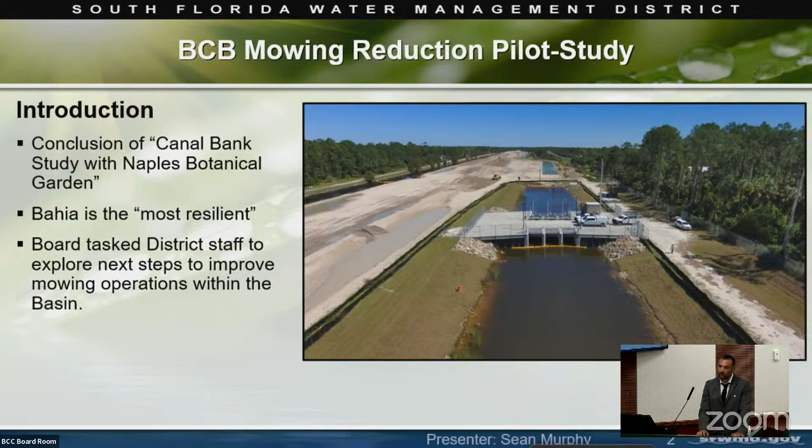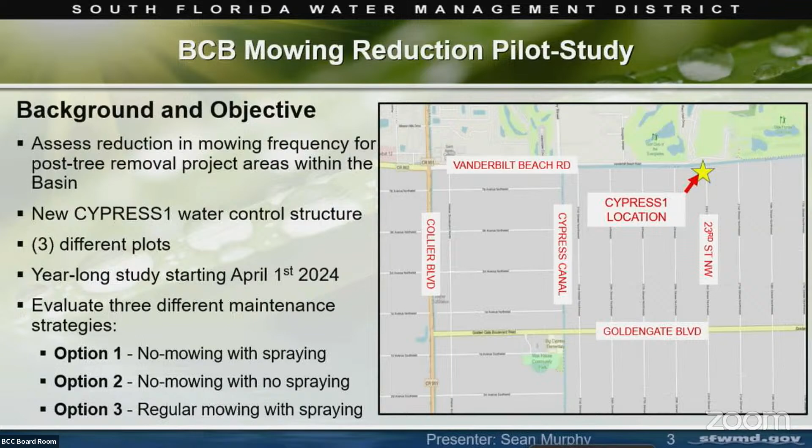So the basin is proposing to conduct a year-long study at the Cypress 1 water control structure while it is currently not connected to our canal system. This study will partition the structure into 3 sections to examine the impacts of implementing 3 different maintenance approaches. Option 1, on the southeast bank, is no mow and spray as necessary. Option 2, on the southwest bank, is no mow and no spray. Option 3 is mown 4 times per year to a height of 6 to 8 inches and will also be sprayed as needed. Option 3 will serve as the control of the study since it's maintained per typical of our rural areas along the canal.

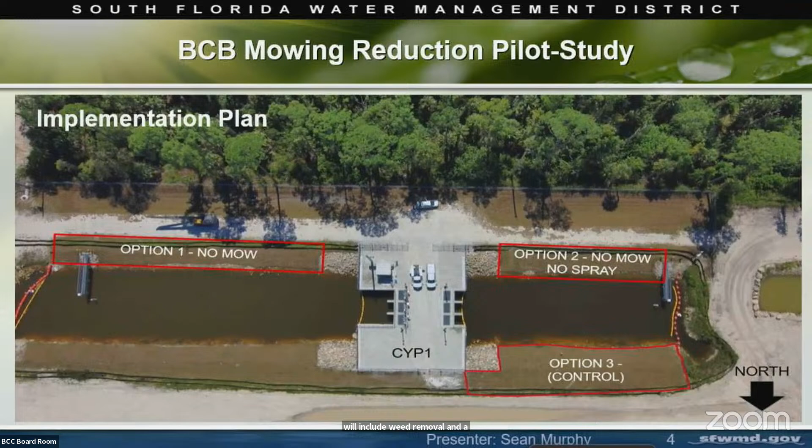Prior to the study, the basin, with the collaboration of the field station and land management team, will install signage, conduct a pre-study site survey to document existing conditions, and also do site preparation, which will include weed removal and a mow, so that we can have a baseline prior to the start of the study.

The field station, land management, and district project manager will all meet on site monthly for the duration of the study, and we will monitor and collect the following data: average plant height, photos, percent coverage, and a running list of invasive species in the study area. We'll also keep a detailed record of costs associated with mowing and spraying.

Additionally, there will be monthly reports summarizing the conditions and data collected at each site visit. At the end of the study, a final report will be created with the help of the field station and land management team detailing the results and findings. A final presentation will be given at the August 2025 board meeting.

So in summary, as part of our ongoing efforts to improve canal bank maintenance operations within the basin, and with the board's concurrence with the study, we've reviewed various strategies and identified an opportunity at the Cypress 1 water control structure. This study will evaluate the effectiveness of the 3 maintenance options and gather valuable data so we can better inform future decisions regarding canal bank maintenance, with the overall goal of reducing operational costs.

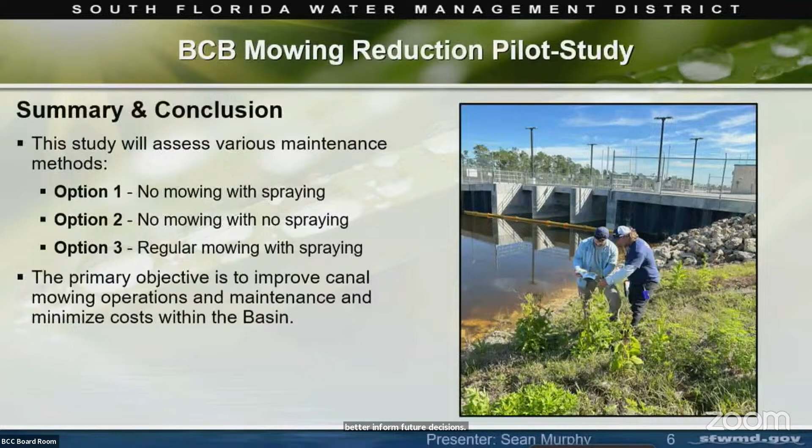So with that, Madam Chair, any of the board members have any questions? I'd be happy to answer. Great, questions from the board?

Go ahead, Andy. When you're spraying, what are you spraying and what do you spray with? So this will be sprayed by backpack application—they'll be going along doing spot spraying treatment. As far as the chemical, I think it's 2,4-D that we use. That's pretty standard throughout the field stations and land management.

Okay, other questions from the board? I had a question for you, Sean. How did we get to the point where we wanted to test using just Bahia?

Yeah, so we got there by concluding our study. From our previous meeting, we found that Bahia grass was the most resilient. We tested the alternative species—those 3 other species—and also worked with the land management team, going over their previous studies and what species they've used. The major issue was just the weeds and invasives, and Bahia had the most robust root structure—not only for our main priority of flood protection, but also to outcompete the invasives and other weeds. So it was the most resilient, and that's how we came to that conclusion.

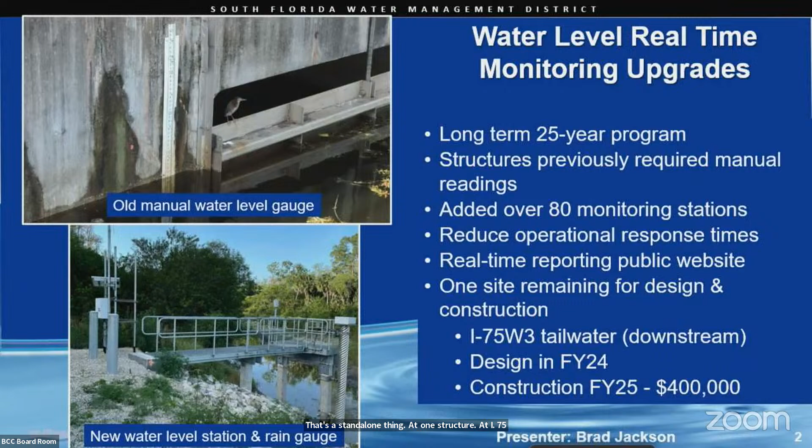So we've been working on this, and on the bottom left of the slide there's a picture of a new station. That gives us real-time information down to 15 minutes or less on rainfall, water level, and other monitoring parameters if needed, like flow. We've put these in all over the basin, and I'm happy to report we have one remaining standalone structure at I-75 number 3, where we still need to do the downstream portion. One of the neat parts of this is I can see it from my office to manage the system, but we also put this out on the website for everyone to look at.

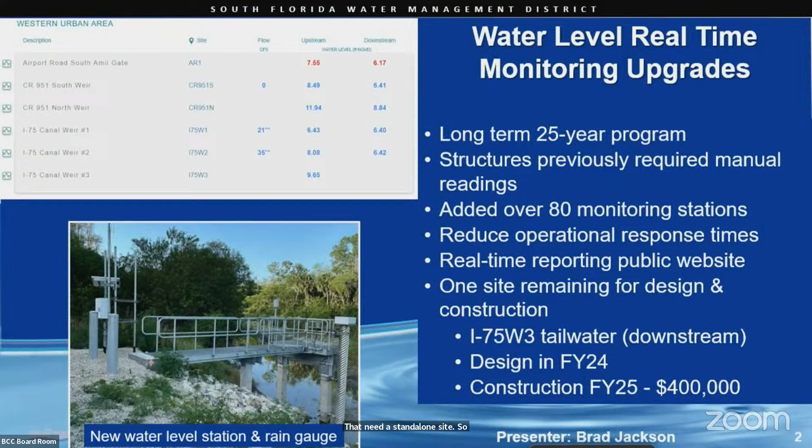We're in design right now of that last structure, and then we'll be working on construction for next year. We've got a $400,000 budget for that for next year, and that should wrap up everything we know so far that we need. There might be some other things that come up from maybe the CWI project or something like that, but as far as our flood control system, we have all of the bases covered that need a standalone site. So it makes my job a heck of a lot easier to monitor the system and respond correctly to what's going on.

Continuing along the same lines as communications and real-time monitoring, all of this infrastructure we've built to monitor real-time water levels and rainfall, the tower that we're proposing to build just northeast of Lake Trafford, is a critical backbone to that system. You've seen this one before; it was discussed previously. We've been working on design of this for a while.

Just to give a little background, this eliminates our reliance on the cellular network. Yesterday there was a widespread cellular outage, and it didn't affect us, fortunately. We could still see everything, but that dependency could affect us in the future. It does routinely go down during storms, not giving us the best ability to see everything.

So when we finish this tower, we'll have that connectivity through hurricanes, through rainstorms. That connection system is basically always up. There's a very, very small downtime, and even when it is, we still have a backup path so that all that information can still get back to the water managers, the control room, and to the public. So it's very important for us to get this last bit of the communication system in.

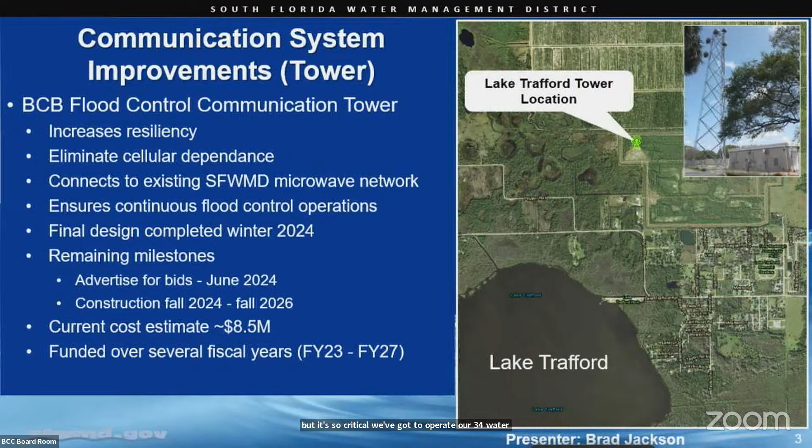I'm pleased to report that the final design is rounding the corner. We finished our 90% plans this last winter, and we've got some remaining milestones on the slide, but basically we'll be going out for bids this summer, with construction anticipated to start this fall and take a couple of years. We have a current cost estimate of about $8.5 million. It's a large project for the basin, but it's so critical—we've got to operate our 34 water control structures and provide flood protection for everyone who lives here. I'm so glad to see this one moving along personally.

Moving from communications into flood control improvements, we've got a program to improve flood conveyance for certain key areas of our canal system. We can't widen all the canals everywhere we want to or need to, but we do have some systematic places where we can widen them and improve how much water can move through the system.

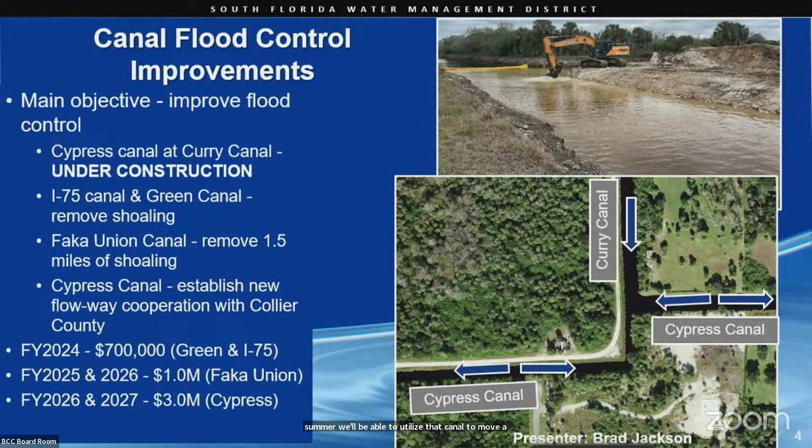That's where we want the water to go through during a storm event. So the goal of those projects is basically to remove that excess material so the water can move freely. There's also additional shoaling we've identified, about 1.5 miles long downstream of the Faka Union number 5 structure. It's all the way on the east side of our system, and there's quite a bit of sedimentation we need to remove there. We've got funding allocated in 2024, 5 and 6 to tackle these areas and get that material out.

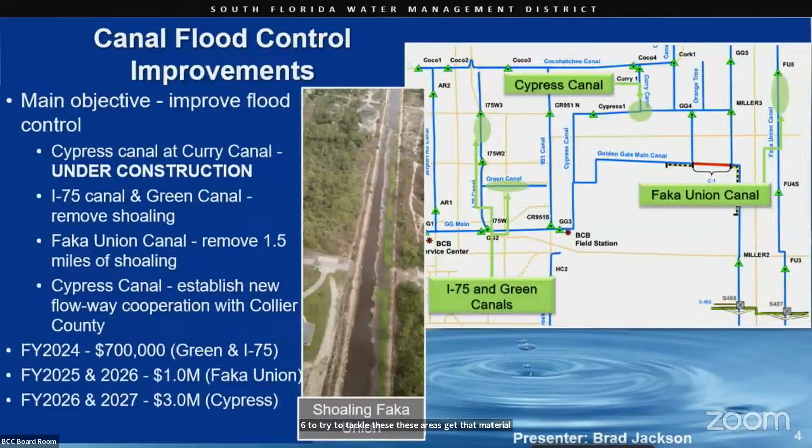Next here we've got the Corkscrew Canal Headwater. This one ties into what Lisa just talked about with the CWI project that's just getting kicked off. To back up a little, we've been working on a hydrologic model that simulates what's going on in the region for the last few years. That tool is complete this spring, and it tells you how the wetlands work, where the water flows, and how the system responds to real rainfall. It lets us insert projects into that tool, and it'll simulate what may happen as an effect.

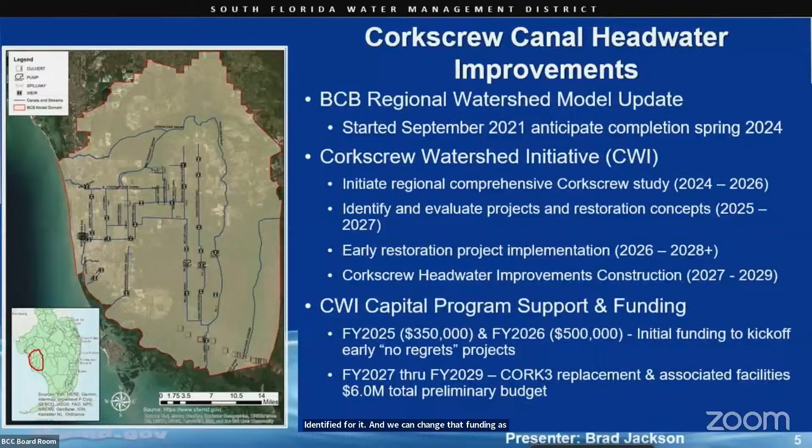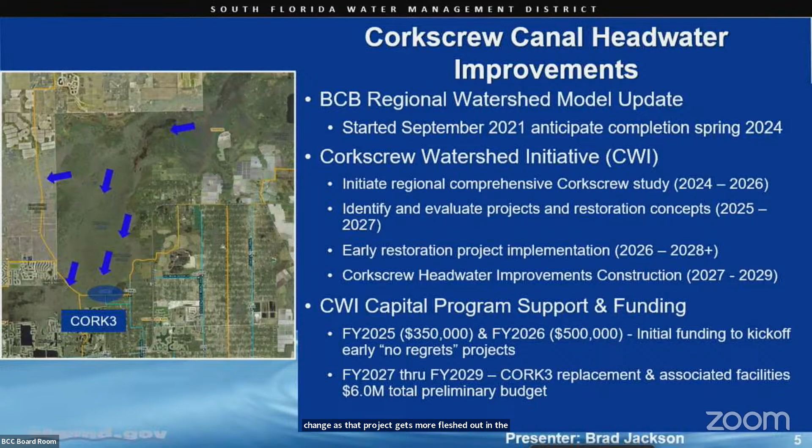We don't know what they are yet, but we have funding identified, and we can adjust that as those projects get more fleshed out. It's important to get these things completed and get those projects identified and started quickly. The last bit of the support program for the Corkscrew Canal Headwater is our Cork 3 structure. Over here in the blue area is our Cork 3 structure, one of our further northern structures, and it's an interface between Bird Rookery and our canal system. We know something needs to be done with that structure to improve the interface between the swamp, the natural areas, and the canal. We don't know exactly what that will look like, but we have money programmed in the further out years as the study finishes to help inform us what we're going to build, what features, what type of structure. We have some money programmed in for that right now, $6 million, but that will change as the project gets more fleshed out. I'm happy to see that one get some legs and get moving, because that structure definitely needs attention in the future.

So I'll move away from restoration and into a little bit more flood control. This is the I-75 canal. It runs north-south, basically from Golden Gate Parkway all the way up to Immokalee Road. Here we have a structure on Pine Ridge Road, called I-75 number 2, a very clever name. I-75 number 1 is further south, just south of Golden Gate Parkway.

The number 2 structure is an older structure that requires manual operation, and we're trying to get away from all the manual operations we have. When we replace it, it will help us improve the flood control of the system, and it'll help us hold more groundwater when it's hydrologically appropriate. We don't want to do that in July necessarily, but in the dry season, when we want to hold onto that extra water, it will allow us to do that and respond correctly.

The I-75-1 structure is basically redundant at this point. The downstream structure we built, GG2, kind of takes the place of I-75-1. So it didn't really make sense to keep maintaining an old structure that serves no purpose. It's just in the way.

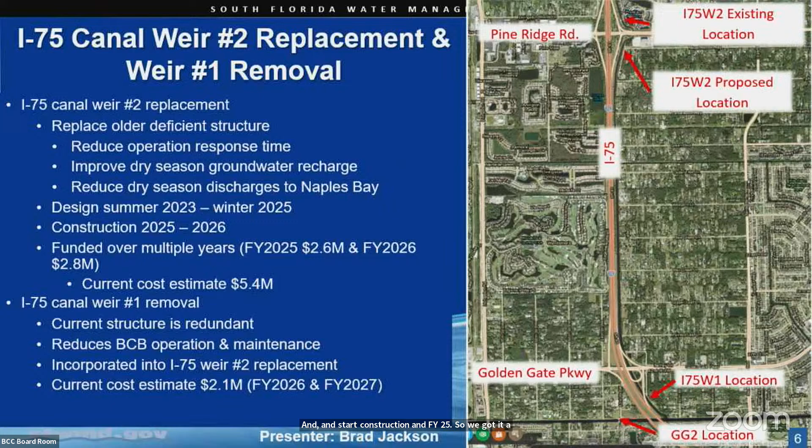So the design for both of these are underway. We packaged them together to get some savings there. The I-75-1 structure will be completely removed, and the I-75-2 structure will be moved south a block or two, just on the south side of Pine Ridge Road, and start construction in FY25. So we've got a little bit more than about a year of design left to finish that up, but it's well on its way and looking good.

So more on flood control improvements. We're going to shift focus here to the eastern side again. This is Faka Union. If you remember where the canal flood control improvements were, this starts where that one stops. So at FU5, which is the bottom star here on the right picture, this study is going to have us look at these 3 control structures at the very top of that system. They're basically the original system that was built when the canals were built, some of them. FU5 has its challenges. You can see on the bottom left, it gets clogged up with debris just on a routine basis.

The field station does a great job removing debris and keeping all of it out of there, but it can break loose and get clogged up in those small gates no matter what we do. So this project isn't necessarily construction right away. It's a study. We want to figure out how do we want to rebuild these, where do we want to rebuild them, and then we can program exactly how we want to do that and when we want to do it. But first we have to have a plan, and so this plan will basically tell us how and when to do the structure improvements.

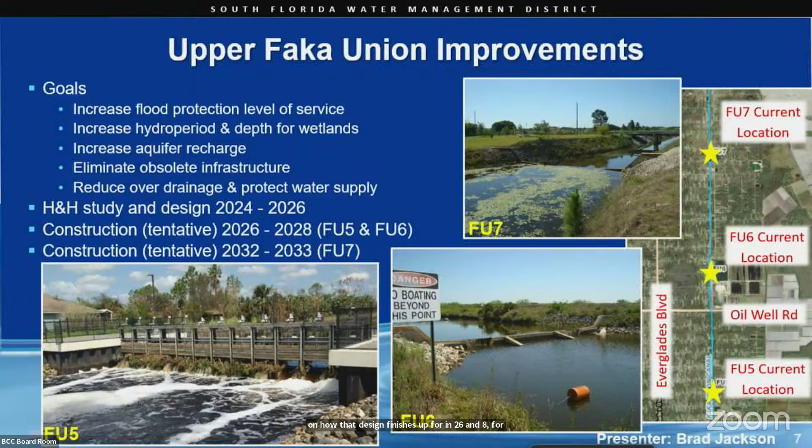Our belief is that FU number 6 is redundant. We need to complete the study to support that, but we think it's redundant, and we hopefully can remove it and have one less structure to maintain, because it serves basically no purpose if we upgrade the downstream structure. So we've got the study starting this year in 2024. It'll take a couple years to finish all that up, and then hopefully we can start construction, depending on how that design finishes up, for in 26 and 8 for those southern 2 structures, and move those along, which will be a great benefit.

So when we completed our flood protection level of service study, this structure looks susceptible to storm surge events. It's susceptible to sea level rise. Its level of service will decrease over time if we don't do something to improve the structure. It's a difficult structure to operate. It's got manual gates, some of them are automated. So it's a challenge to deal with in a storm event.

So really the main goals of this project is to improve the flood performance of the system. And that may not mean anything with those words, but in essence, we want to lower the water levels during a storm event inside the canal. And if you can do that, then the water can more easily get to the canal and reduce the adjacent flooding in the community. Another thing we want to do is reduce the storm surge effects.

As we've seen in recent history, we have susceptible events from storm surge. So this one, we were fortunate the way Ian came through. This one didn't get impacted as much as others, but that was just chance the way that one came on. So we want to redesign these in a way that we can account for some of that and reduce it. We'll never be able to eliminate it completely.

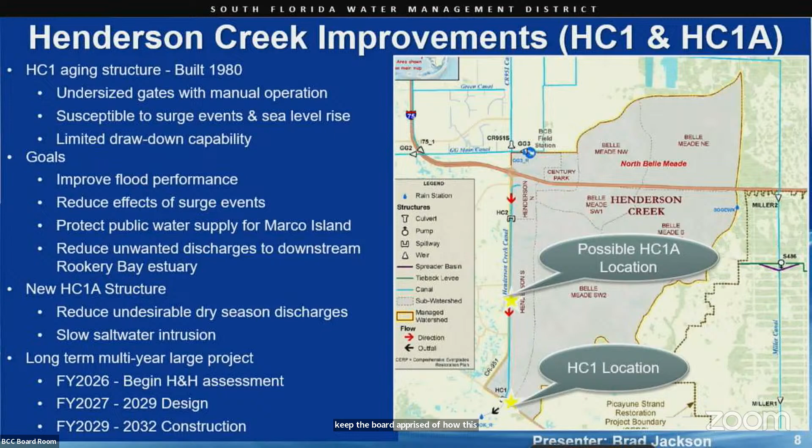So back up east to the system, this is Golden Gate #5. To orient everyone, this is between Everglades and Immokalee, just north of Randall Boulevard, where the current structure is. That area, along with all the other Golden Gate Estate areas, has a lot of development. Drive down any street, there's homes being built. And so the main goal of what we're trying to do here right now is identify the spot where we want to put the new structure.

We want to secure the right of way for it so we can get that, so no one puts a home there that we then have to work with and deal with in the future. So that's the main goal in 2025, is to purchase the right of way for where the new structure is going to go. Fortunately, we've already kind of identified, we did the modeling in-house to tell us where we want the structure to go. And what you see on the left, I'll explain that a little bit.

That's really the dry season benefit of the structure. So the current structure today is set too low and the groundwater over-drains. We can do better than that and hold that fresh water in the system. As I've mentioned during my water conditions report and other times, the more we can hold that in, the more fresh water is available and the less that goes out to tide that is not needed.

So the different colors on the maps, the new structure's just to the south end here of where the red stops. But the red shows a 1.5 foot difference of how much more groundwater is going to be in the ground when we put the new structure in. And so this simulates and shows what the effect of the new structure is going to be. And it's widespread. It reaches all the way out to Immokalee Road, further out into the estates and up to GG 6 and 7, almost up to the very top of the structures. So it's got a very big impact on how much groundwater we can save. And that's every drop that doesn't go out to Naples Bay or downstream where it is not needed.

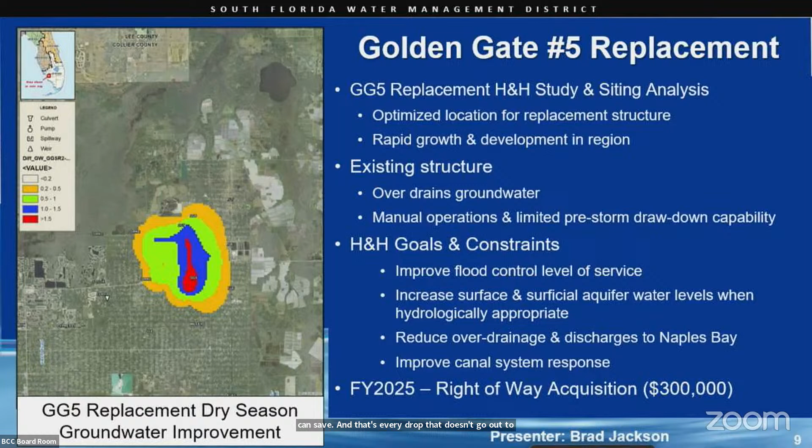So I've got 2 more projects to list off and talk about. They've got a very strong and aggressive project schedule for all of these, but these 2 are the Gordon River structure and the Palm River structure. So I'll talk about these together.

These aren't new, but it was a condition of the South Florida Water Management District and Collier County Cooperative Agreement that was just completed and signed last year. That agreement shows we will design and rebuild these critical outfall structures, these saltwater barriers that provide flood control.

So we're going to be starting design of these 2 structures. You can see this Gordon River #1 is just south of Golden Gate Parkway and west of Airport Road, just south of Freedom Park, basically, if you're familiar with that. And this is what the old structure looks like.

There's no operations on it, there's no resiliency to it. The water just comes up and goes out, and it can also come in from the tide side. So just like with the Henderson Creek one I talked about and other coastal projects, we're going to put in something more robust that will prevent that saltwater backflow while maintaining the current flood protection level of service. Being a coastal structure, it's got a little bit more scrutiny we have to look at.

We make sure we're looking at storm surge and possible sea level rise, and we want to make sure we're including remote operations, backup power, and put all the bells and whistles on these. Because if these go down during a storm, they're going to be the most affected from a hurricane event. So these are important to get right.

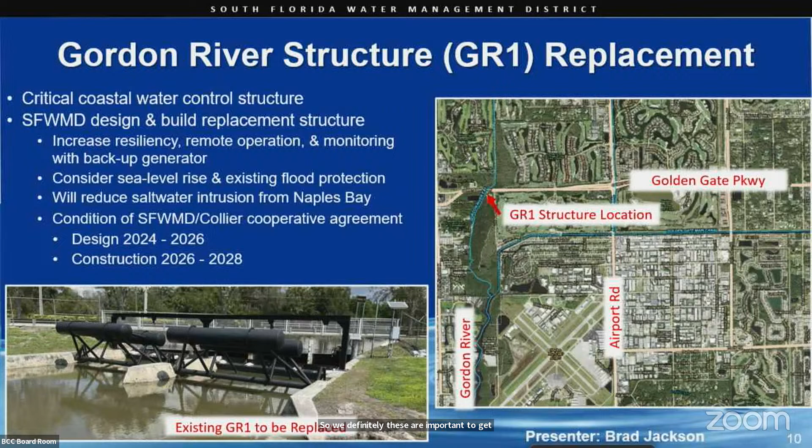So this one is scheduled to start design in 24 and 26. It'll have a 2-year window. And then I'll flip quickly over to the next one, because we're running these in parallel together as one package. This is the Palm River.

So to orient everyone, this is north of the other one, but it's by Immokalee Road and Airport Road, on this tributary to the Cocohatchee River. These really are very close to our control structures that we already manage, so it makes sense for us to go ahead and take these on.

All the same things I just said about Gordon River will apply here — all the same types of considerations as far as remote operations and backup. It's got a similar schedule, so these will be running together, and I look forward to getting these kicked off in the next year on design and moving that forward.

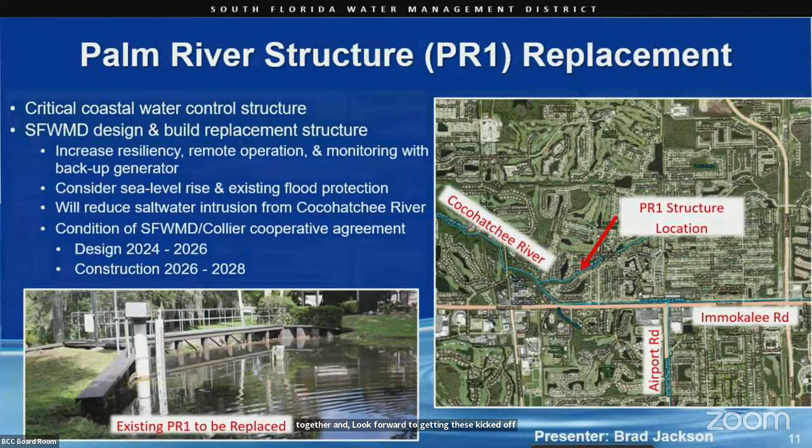I will close here. This is just a slide summary of your 5-year capital improvement plan and forecast for the program I just went over. So each line on there, you can look at the budget we currently have for 2024, 2025. And then we also have a planning year — 26, 27, 28, 29. So those numbers will change as the projects come more into focus, and costs unfortunately probably will not go down.

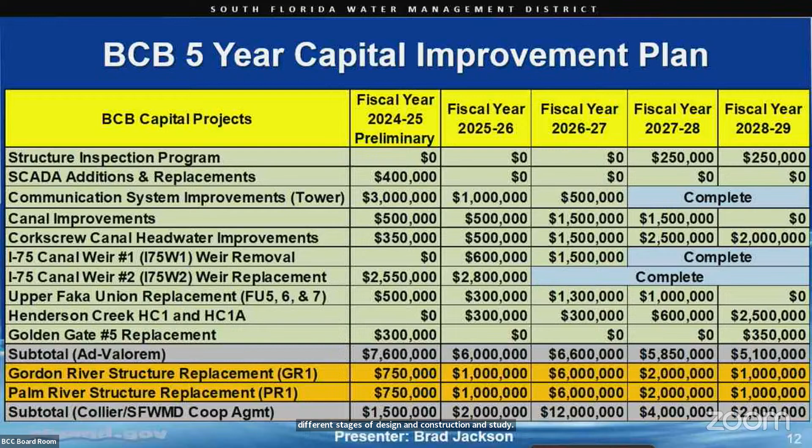But we are planning ahead, and these numbers do get tweaked and adjusted as the designs move forward. But there you can see from the totals and the number of projects, it's not a small amount of projects at all that we're working on. There's a lot of things up in the air, all in different stages of design, construction, and study. So these projects will be with us for a while moving forward. And I will close there. If anyone has any questions, I'll be happy to answer them.

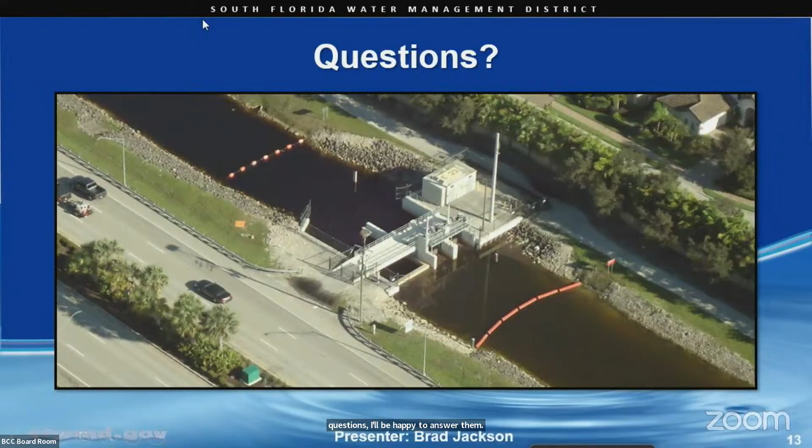Thank you, Brad. Questions for Brad Jackson? I have one — this might be a silly question, but what's the lifetime of a weir? So a new one we design for a 50-year life, kind of design horizon. Some of them, that's why we're starting to replace some — they're getting closer to that end or past it. So that's our design life expectancy, kind of a key or a target.

The other one is the HC1 project. Do you work with Marco? Do you bring them in? Are they knowledgeable about the work that you're doing? I'm assuming they are, but we haven't started that project yet. Once it happens, yes, we'll bring stakeholders in — Marco Island Utilities, Rookery Bay. With all of these projects, we have a set of stakeholders we work with to make sure they're informed, and that we're not making adverse changes that will affect their current operations, because they have a current permit to withdraw a certain amount of water at different levels. So we don't want to affect that negatively.

And if we can improve it, even better, but we definitely want to work with them.

Final question. Besides this open forum for the public to listen in, do you do anything out in the field? What you're doing is amazing. I get questions about flood control all the time, from different cities, counties, the basin, the district. Is there any other way to get the word out? I'm working on my end to do a forum to inform at least the 90,000 real estate brokers in the city, state, or county. But is there anything else?

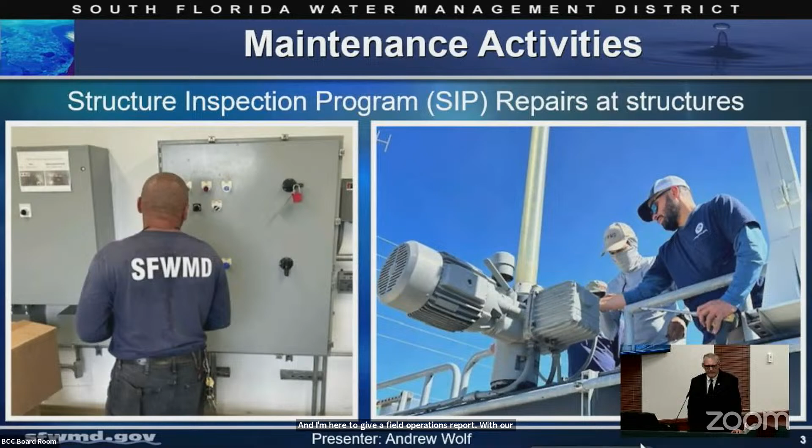We have a SIP program, a structure inspection program, where every 5 years each structure is evaluated by engineers and a detailed report comes out. The following year, we get the report and repair anything that needs fixing. They inspected half our structures last year, and this year they're doing the other half. We're in the first half of the repairs this year, so we have until October to achieve 100% on these repairs. That's taken up a lot of our time. What's good to know is it's not a lot of large repairs, mostly minor things like paint chipping. But it's good to have them inspected both above water and underwater every 5 years.

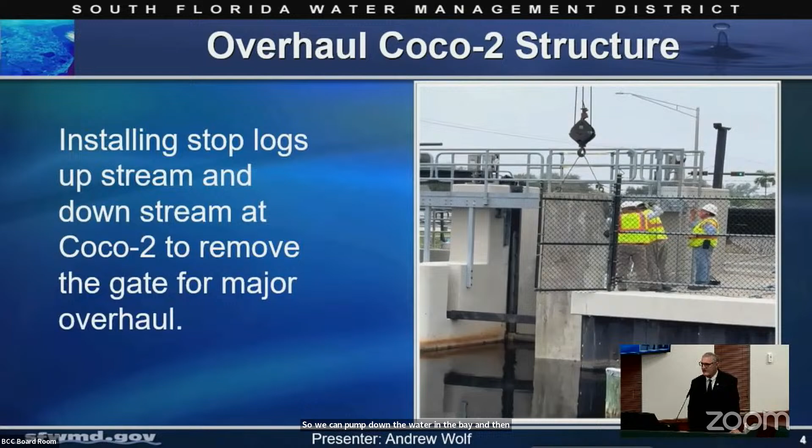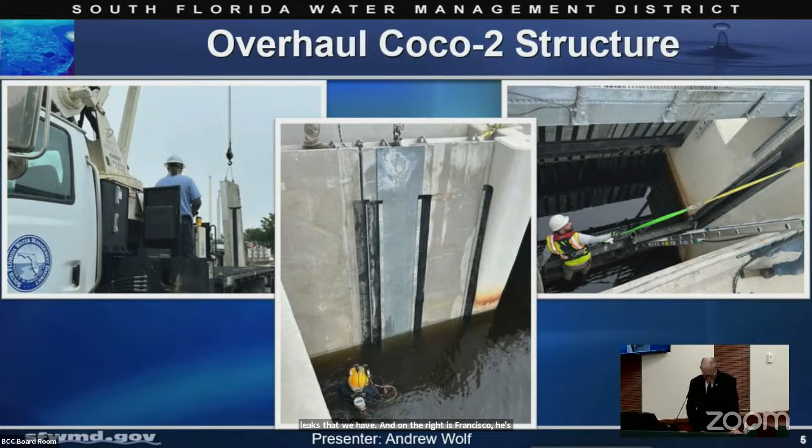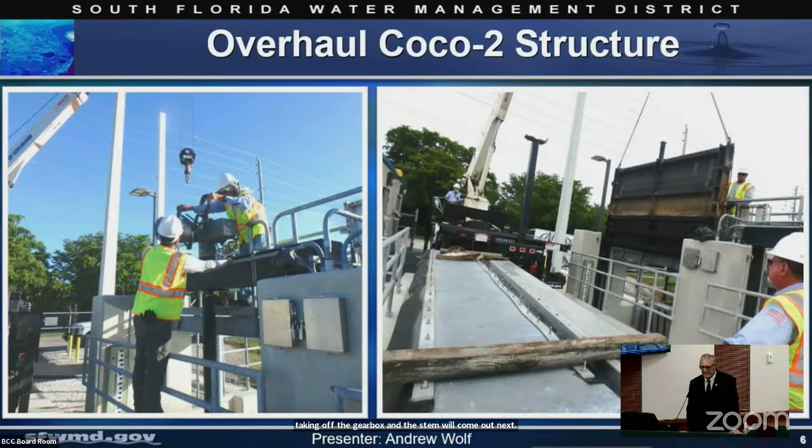We have to basically strip the structure of everything mechanical. There on the left, you see them taking off the gearbox. The stem will come out next, and then the top deck. On the right is the crane truck pulling the gate out of the structure. The gate will be brought back to our field station.

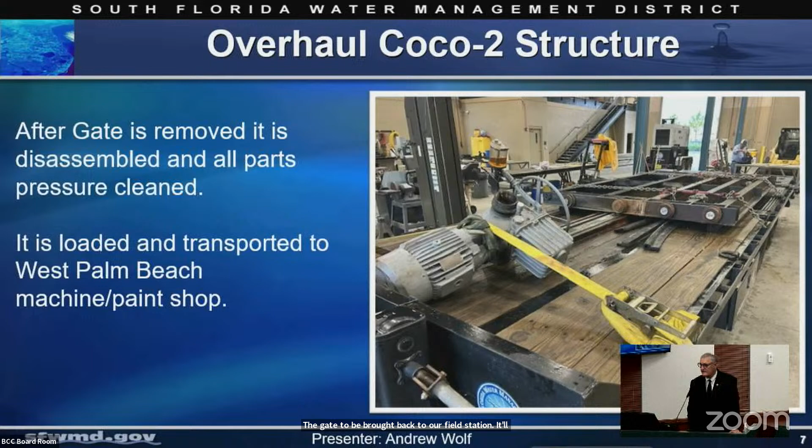It'll be dismantled, pressure cleaned and loaded, and taken to West Palm Beach Field Station. West Palm Beach has a machine shop and a paint shop. What they'll do is blast the gate, take off all the rust and any paint, check for any damage and repair the damage in their machine shop, and then prime it and repaint it.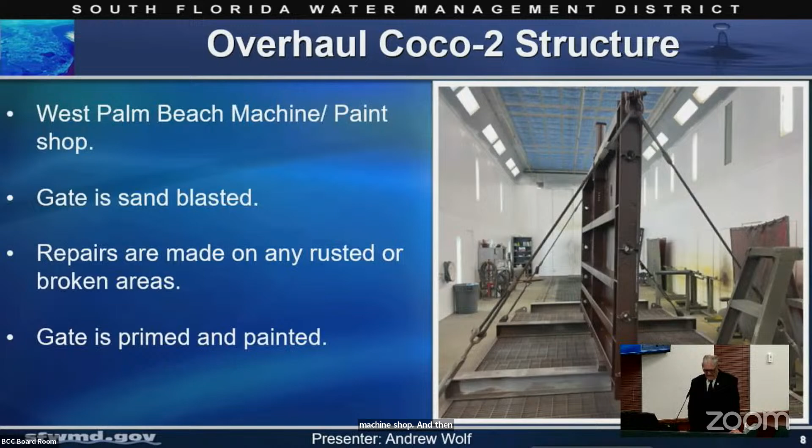We just got that gate back and we'll be installing it, so I'll update you at the next meeting on the install. Then we're going to go to gate 2 and do the same thing with that gate, the Coco-2.

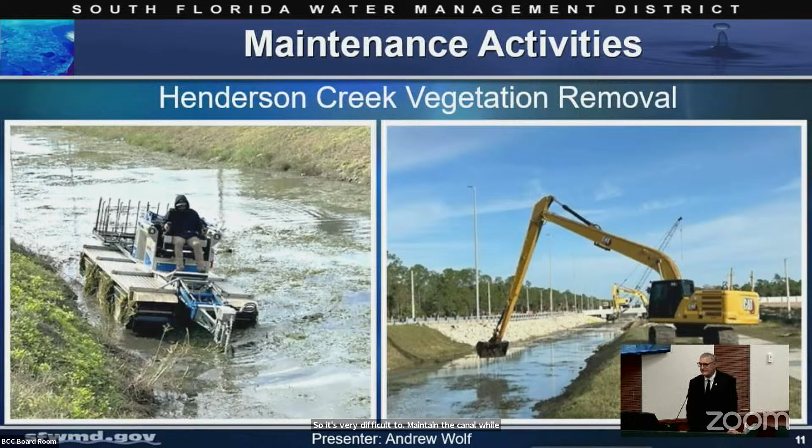Vegetation management is always an issue. Here we have our Truxor boat, and our long reach on Henderson Creek, removing the heavy vegetation. You see in the background there's a lot of bridges going in there, so it's very difficult to maintain the canal while these bridges are being constructed.

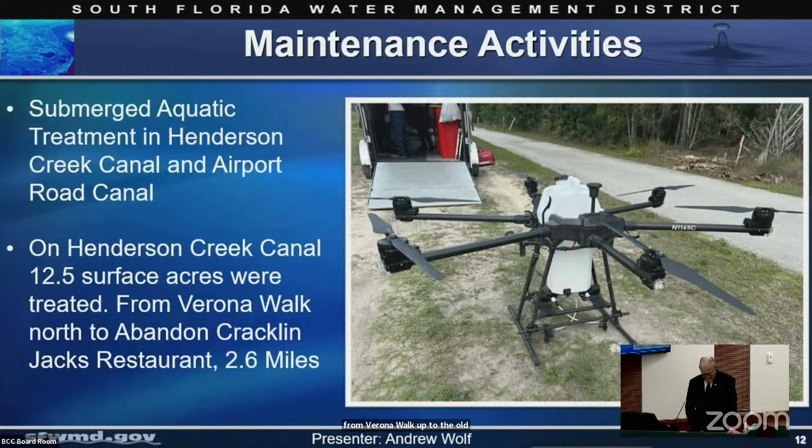The submerged vegetation kind of got out of hand in this little area, so what we've tried something new at the basin is an aquatic submerged treatment with a drone. It's the drone on the right. We did 12.5 surface acres from Verona Walk up to the old Cracklin' Jack's restaurant. Here on the video on the right is the drone actually spraying the canal. One 5-gallon tank of water will do one acre.

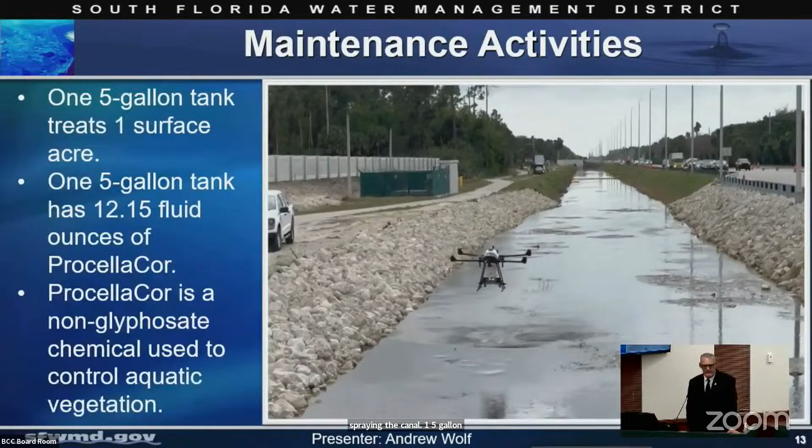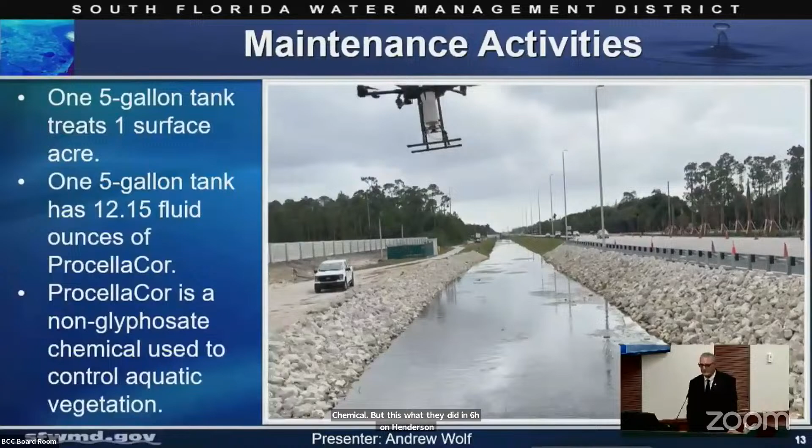In that 5 gallons of water is only 12 ounces of chemical, so it's a very low rate. We're using ProcellaCor, which is a non-glyphosate chemical. What they did in 6 hours on Henderson Creek with a drone would have taken a week and a half in a boat, because the drone can just hop over the bridges and go to the next section, where a boat would have to be pulled out and moved to the next boat ramp and put back in. So in 6 hours, they completed the 12.5 acres with a cost saving of probably around $1,800 to $2,000 over using a boat.

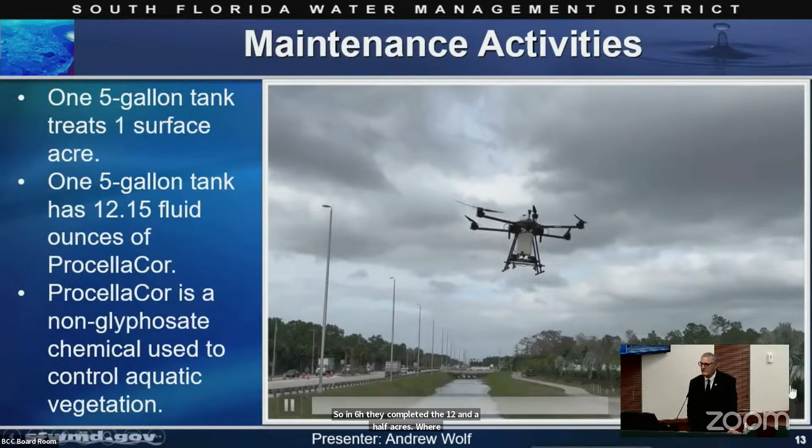The public is actually very interested. We had a lot of people stopping and taking pictures, and it's pretty interesting technology. Big Cypress Basin is one of the first to use this drone treatment.

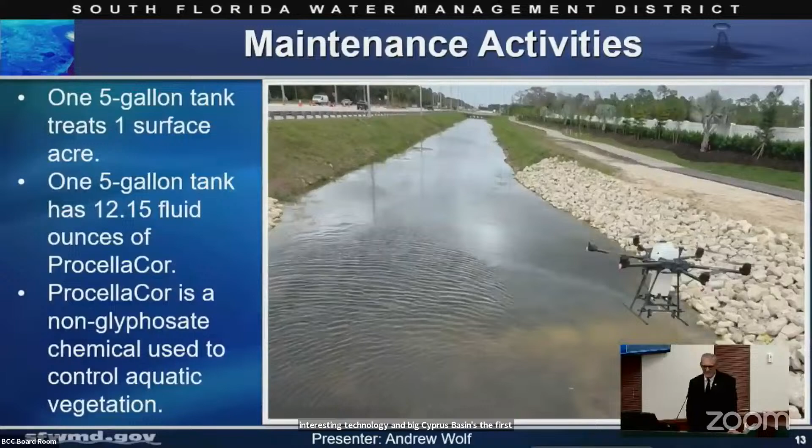A 3-month look ahead: we continue with the structure inspection program repairs. We'll be installing gate number 1 at Coco and removing gate 2 for overhaul. And we are taking delivery of the new Ford electric truck, it's called Lightning, sometime in March. It has been built, but they haven't given us a delivery date yet. So at the April meeting, I'll give you a little update on it and see how it's working out.

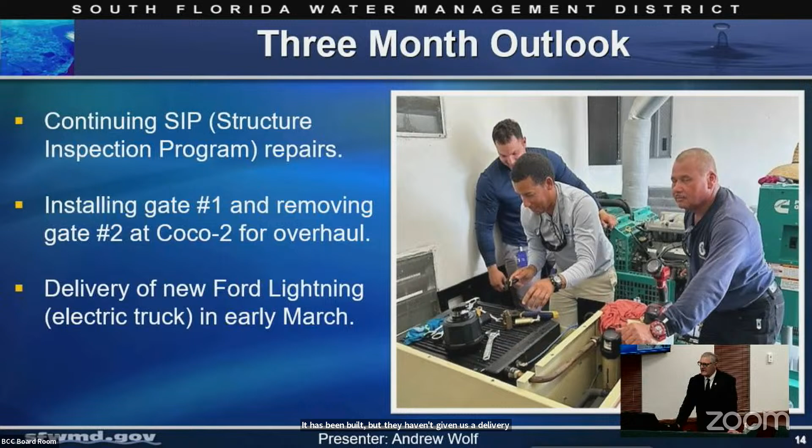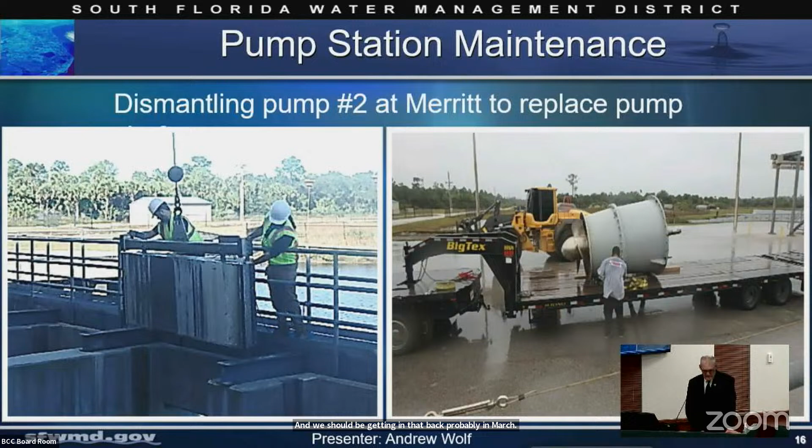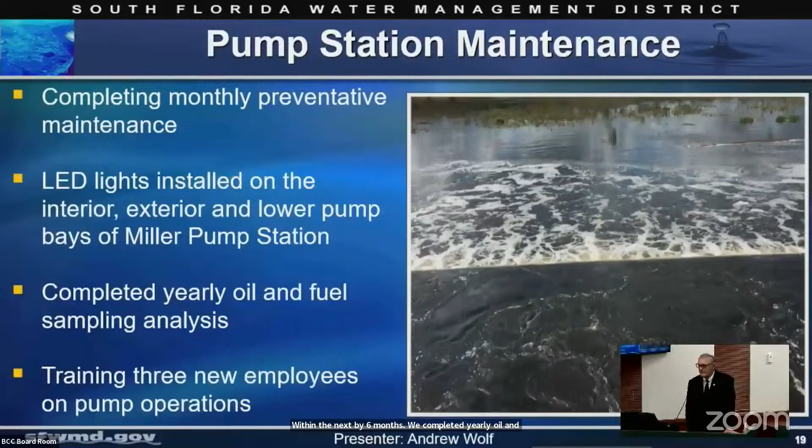For pump station maintenance, we've completed monthly preventative maintenance. We have an LED light program, which we've completed at Miller Pump Station. There are very few regular incandescent or fluorescent lights left, and we should be done changing them all out within probably the next 6 months. We completed yearly oil and fuel samples, and we continue training 3 new employees on pump operations.

Okay, board questions and comments for Mr. Wolf? Quick one, go ahead. We own the drone, correct? No, it's a contractor. Oh, it's a contractor. Yep, okay, interesting.

And with the manatee area, did you only have to remove the trees on one side to get access, or did you have to do both? Actually, both sides, because we're going to armor the banks on both sides so the ponds won't silt in again. Okay, right, so it's mitigation. Had to take out everything this time. All right, thank you. Any other questions from the board?

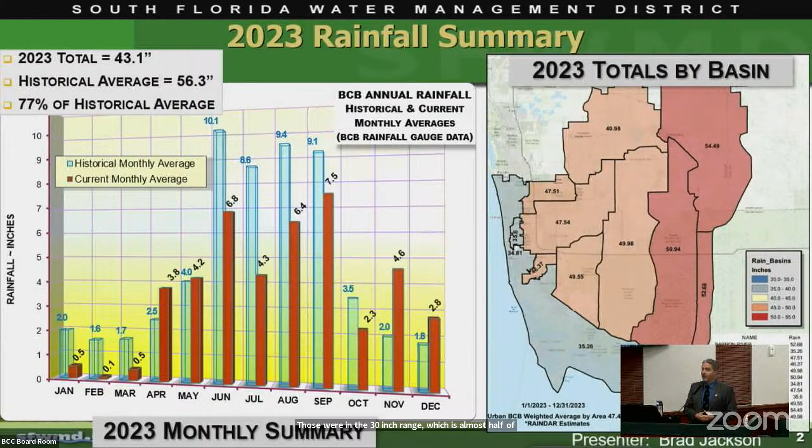Quickly run through each month and what's happened since our board meeting. Back up to November. November was the first time in quite some time where we were above normal. Somehow a switch flipped and we went from too dry to more wet than normal. November got us 4.5 inches of rain or so, more than double our average. It really helped bring water levels up and start to rehydrate some wetlands, so we can hold on to that water and start to make up the deficit we created over the summer.

But 4 inches alone isn't going to do that all in one sitting, but you can look at your basins and it was pretty widespread. Everyone got 4 to 5 inches of rain, so it was a nice, good uniform coverage of rainfall. At this point in time, we really held on to most of that rainfall and didn't have to make big discharges.

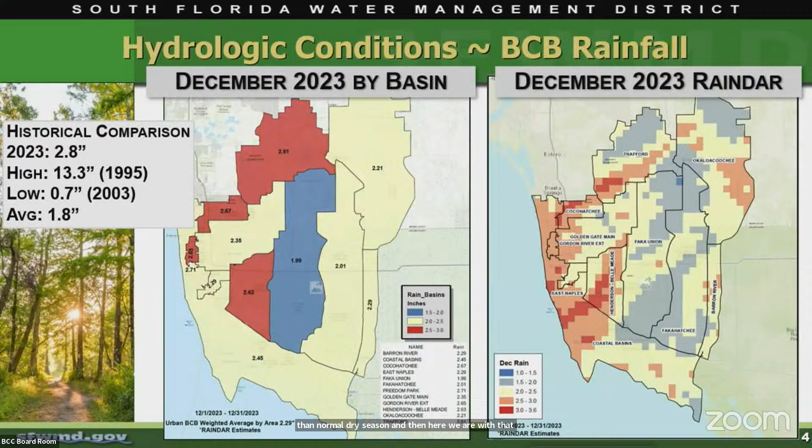Go to the next month, December. Not as much of a surplus there, but we did have more rainfall than normal. This was kind of as advertised, as I talked about in an October meeting - we were expecting a wetter than normal dry season, and here we are with that realization. This is a far cry from what's happened in 1995, no, 13 inches of rain, but again, this is all beneficial stuff.

And in January, more of the same, but this one's very close to average. The northern part of the system - the Lake Trafford, Corkscrew Swamp, Golden Gate main area - got more than the southern and eastern areas, but not by a lot. Overall, pretty good coverage. These are all front driven, so as the cold fronts move through, everyone gets a good soaking, which is different than your summertime rainfall, which is very sporadic and random.

And then this month so far - this is just through the 19th - we did have a decent little rainstorm, I believe it was Sunday. But through then, we've got about 3.5 inches of rain, well above our average. And if you look at last year, we had 0.1 inches of rain in February, so we're doing much better than then.

Again, I'll talk about how we're holding on to as much water as possible to erase some of the deficit we accumulated. So instead of looking at just 2023 in total, I want to look at just the water year. To remind everyone, this starts May 1st - we flip the clock and reset the gauge, and then it ends at the end of April. So overall, the change here - wet season was dry, dry season is wet. It's weird and backwards, but it's basically a function of El Nino and the way the weather patterns have been coming across the area.

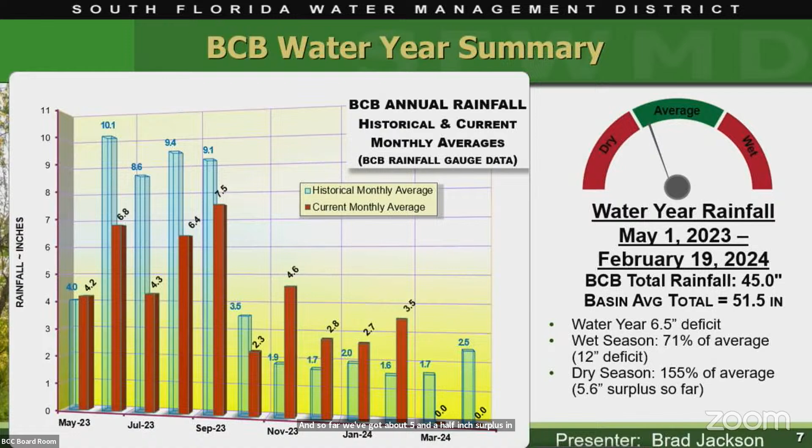Overall, we got about a 6.5 inch deficit for the water year, which isn't too bad considering how we started the dry season. We ended the wet season with a 12-inch deficit, and we've cut that in half by now. We still have a couple more months to go, so maybe we'll get to an almost average year. So far, we've got about a 5.5 inch surplus in just the dry season. So we'll continue to operate in a way to hold the water in the system as we can.

That's the part I'll go through here next. To remind everyone how to read these graphs, there's a lot of lines here, but very quickly, the blue shaded area is kind of our target range of where we like to hold the water level at this particular water control structure. This one on top is GG4, which is represented over here as the blue triangle. The blue line is 2023, and the dashed line is 2024 so far. Generally speaking, the blue line and the dashed line are above this green band, which is kind of your historical average range.

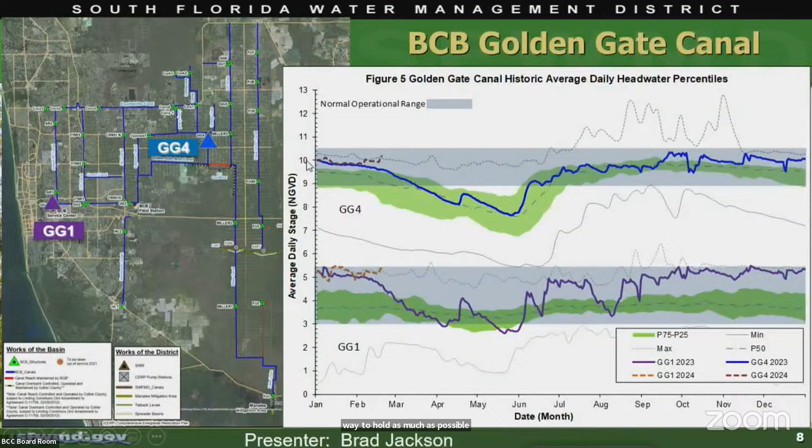That's your 75th percentile to the 25th percentile, so that's where you normally have been in the period of record. The takeaway on most of these is that we've been dry and we're operating the system to hold as much as possible, so you can see these lines bouncing around the very top of the blue range as much as we can with those particular control structures.

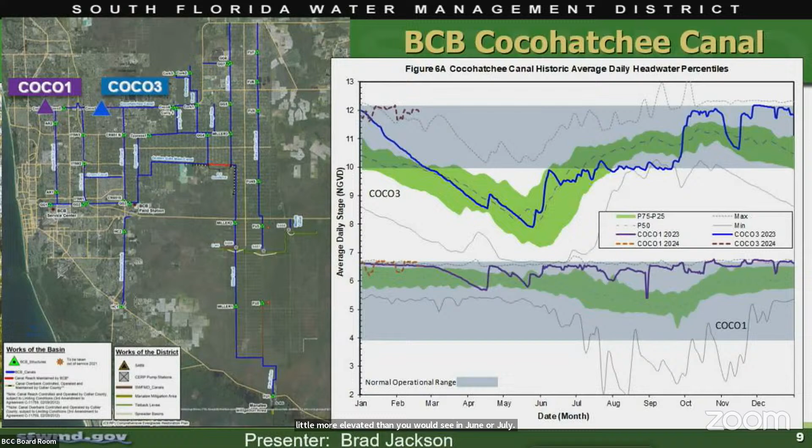You can actually see it's above the historical maximum for Coco 3, which is interesting, showing how much higher we're able to hold things while still providing that flood control. There's not a lot of flow going through these structures, which is important to understand - just because the water levels may look more elevated than you'd see in June or July, we still have lots of capacity in the system in case we need to move water out and provide that flood level of protection to the citizens.

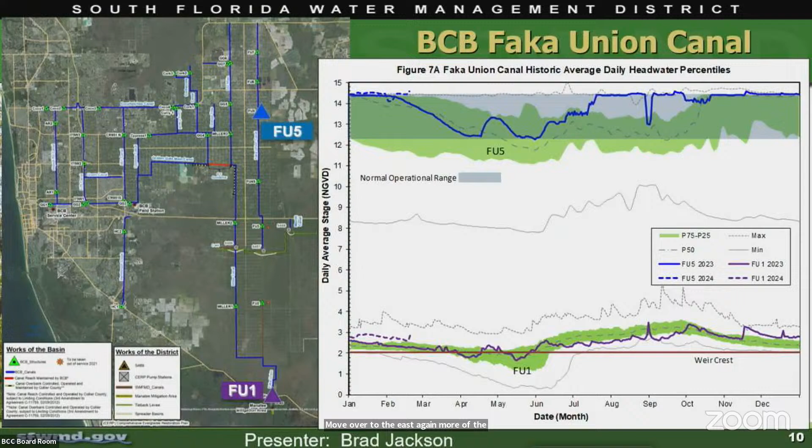Moving over to the east, again more of the same here. It's a good news story - everything's up at the top of the water level range as much as we can. And Henderson Creek, again, is more of the same. All these items are well above normal for this time of year, which is fantastic.

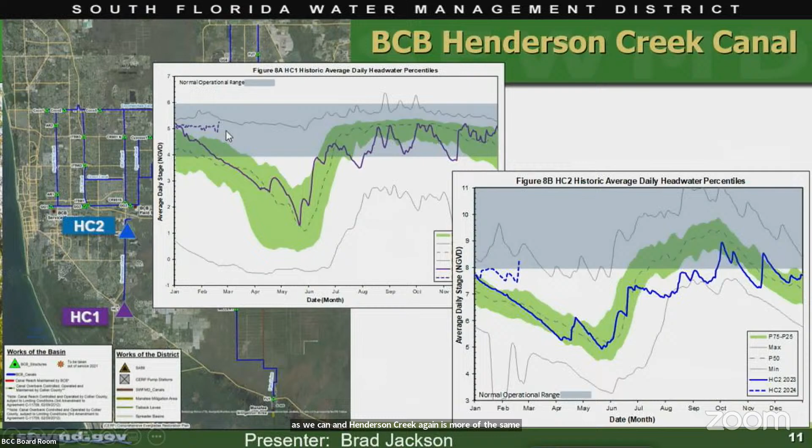I'll transition here quickly and talk about Picayune Strand restoration. It's been another year since I talked about this slide in particular, I believe. What I want to go through here is how much rainfall fell over the restored area and how much we actually pump into that restored area - those are two different things.

Right now we have 2 pump stations online that are pumping for restoration flow. The green shaded area is the current restoration area - it's restored today in some form or fashion - and the orange line is the full project boundary. So once Miller Pump Station is online, Southwest Protection Features are done, and all the other things come online, we can start to fill in the rest of this shaded area and tell a bit of a different story.

Generally speaking, this area got near average rainfall for the year. Overall, about 132,000 acre feet fell just in the green square from rainfall. Compare that with what we pumped, about 50,000 acre feet - that's about 18 inches of depth pumped over that entire area. If you averaged it all up, it'd be about 18 inches over that area that we put back into the environment that didn't used to be there - it used to just go through the canals and out. So that's a good story here.

You can kind of see the same graphs on the right, giving an indication of where the water levels are historically and how much we've pumped. To explain the bottom graph a little: that's how much water we actually pump through the pump stations. You can see in the summer months we pumped barely anything at the Merritt Canal - I mean this is 50 CFS or something.

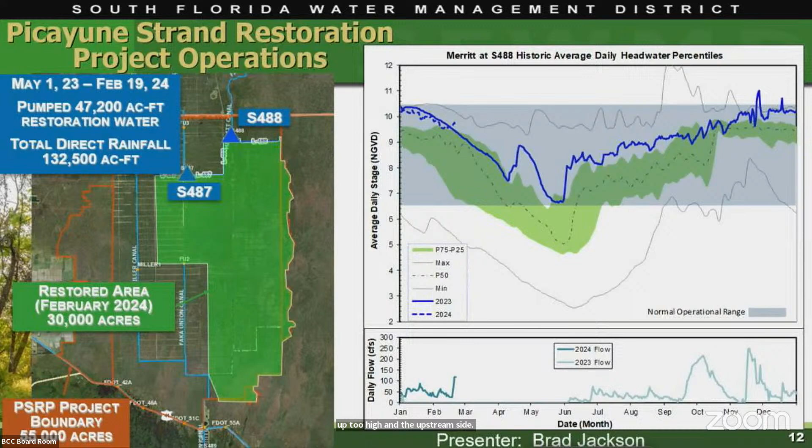So if you remember a year ago, we had a ribbon cutting at our Cork 2 structure. That was a structure that's, again, at the very top of our system. It's one of the interfaces between the Corkscrew Swamp and our canal system. So this was an important one for us to get the remote connectivity to, the remote control on.

And I kind of wanted, since it's been a year now, to really quickly highlight how the operations have changed since this time last year. So to orient everyone, focus on the left side of the screen here.

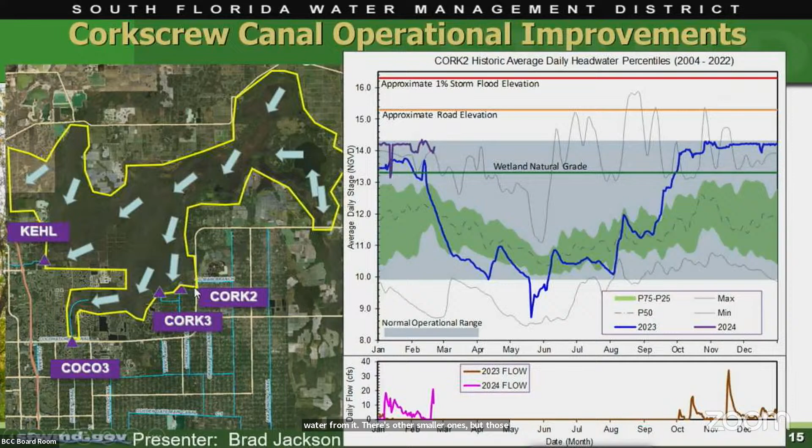And today we're going to focus on Cork 2, right here in the middle. So to zoom in to that section in particular, the Cork 2 structure is right here. And I've got a lot of data over here on the right, so let me walk through that real quickly.

The orange line here, I've labeled that the road elevation. That corresponds to all these different roads over here, and that's approximately the road elevation. It's not perfectly flat, obviously, but that's an average of what we would expect the road elevations to be throughout the region. So we don't want the water levels to go above that, because then you've got water levels above the road, which is not ideal.

We're not providing our flood control and everything, so we don't want to operate in that range. The green line here, you see this green odd shape over here that I'm highlighting, and that's one of the natural slough wetland areas in the area. If you looked at the elevation of that particular region, it hits about this green line. So it's below the road elevation, which makes sense. But if we want the wetlands to be hydrated, we need our canal levels to be above that, so the wetlands are not draining into the canal too quickly.

The way I'd look at this, since our ribbon cutting last year, our blue line here at February was all the way above the wetland grade, and then the rain just turned off and stayed off until September. So this whole past wet season, we didn't operate that structure at all, and it remained shut.

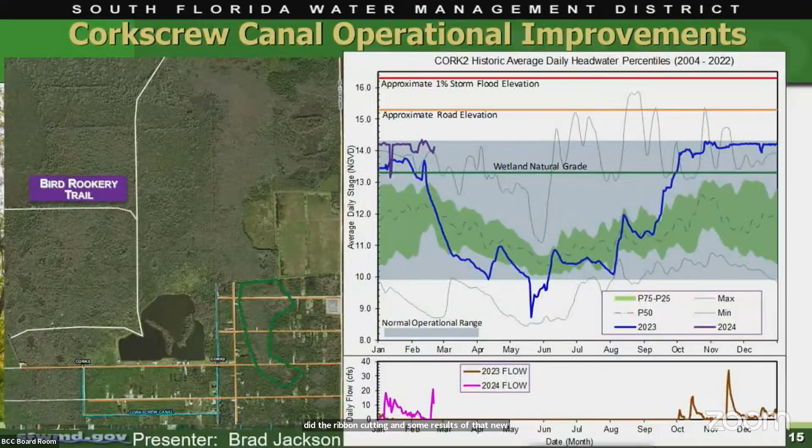It helps us inform what we're going to do with the control structure if we do get a big rain event. If the water levels are well below ground, we know we have a lot more breathing room ahead of a storm. If it's not, then we know the system's going to react a lot faster, and we might make some different decisions on how we operate things.

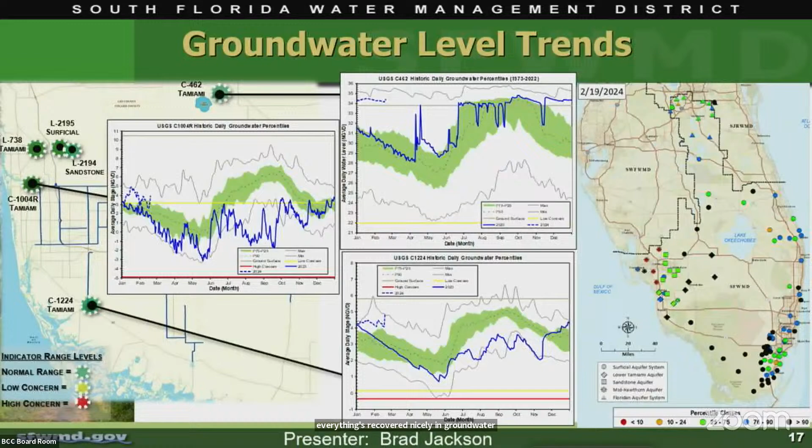Normally in February, I spend at least a decent amount of time talking about groundwater trends, but we're so wet right now and above normal. Overall, the story is, if you looked at this in October, the chart on the right, most of these were in the reds and oranges, which means they were in the lower percentiles. With all the abundance of rainfall we've had, everything's recovered nicely, and groundwater in short looks good for this time of year, well above normal pretty much throughout the system, as you'd expect.

I'll close here with a long-term outlook in the foreseeable future. Through March, April, May, we have an above average chance of rainfall, more than average. As we move into wet season, it's less clear. I mean, those are so far out anyways, but right now there's not one signal one way or the other, whether it'll be a wet summer or a dry summer.

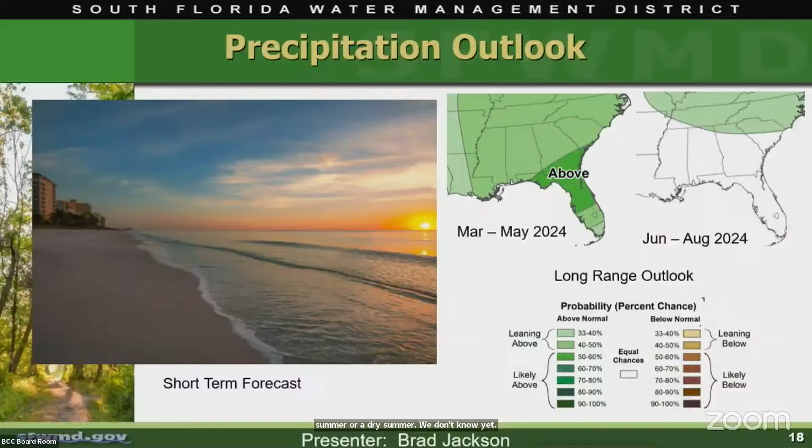We don't know yet, but I do know after today, at least for the next week, it should be dry and sunny, and we should have some good weather.

And I'll close there. If you guys have any questions, I'm happy to answer them. Thank you, Brad, excellent report. Questions for Brad? Go ahead, Mr. Hill.

I'll lead off, Brad. On your chart on page 16, which was kind of cool, the map of the water depths, it seems like it's cut off on the boundaries of your area, such as 41, and to the east on 29. Is it possible to have that same analysis include those areas, to see if there's water flow being backed up by the road structures?

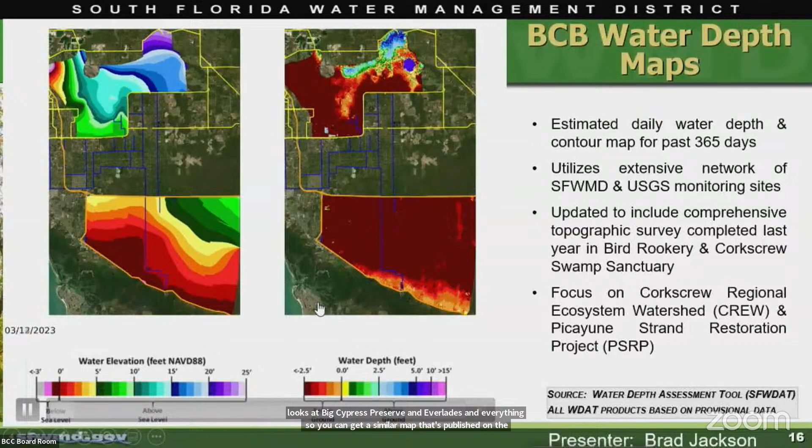So on 29, the district already has a similar tool that looks at Big Cypress Preserve and Everglades and everything, so you can get a similar map published on the website for those areas. As far as what's below here, yes, it is something we could look at. We looked at 41 as kind of being the dividing line. Since that area is tidal, it might not represent 100% correctly, but we can look at it and see what happens.

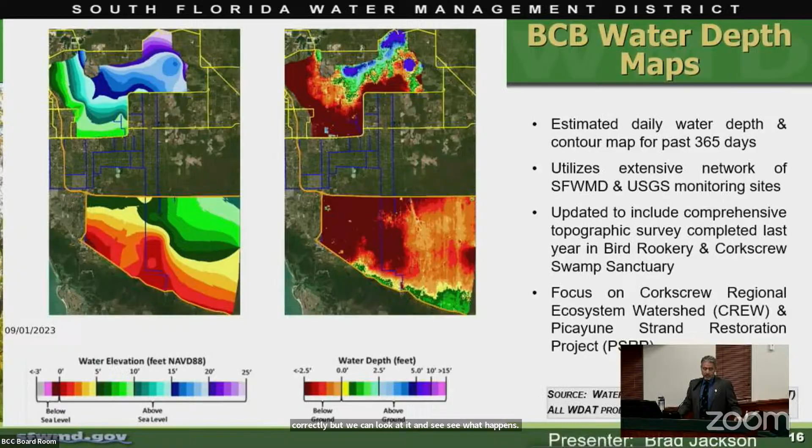And as I commented earlier in the board comments, my concern is that water's backing up around 41 due to 41. Where do you think the water flows out of the Picayune Strand restoration areas, as it moves towards the estuary? Do you have any feel for where it's going? Do we have any data on that?

So we do, I don't have it here, but there are several culverts that were put in underneath 41. There are still new culverts that were built as part of the Southwest Protection Feature. So as that restoration water gets spread out over the north side of 41, there are additional culverts and conveyance systems put in under 41 to move that water out so it doesn't stack up like you're saying.

Okay, and those were done, I think, pre-plugging of Prairie Canal. And then the latest ones are right there by Tomato Road in the Southwest Protection Feature, which are built but not open and conveying water yet. Yeah, I believe that project is just completed, at least as far as the civil work. Yes, the conveyance features are done, but they're not moving water yet because the Miller pump station's not online, so there's stop logs in there currently.

Okay, so, okay, good, all right. Thank you. There's something we can talk about later as to where it's all going. Sure, yeah. Go ahead, Ms. Smith.

Are you just memorizing this and you read this all off, or you just, it's unbelievable, it's just like your report. Okay, I actually have a question, but I just wanted to give you kudos.